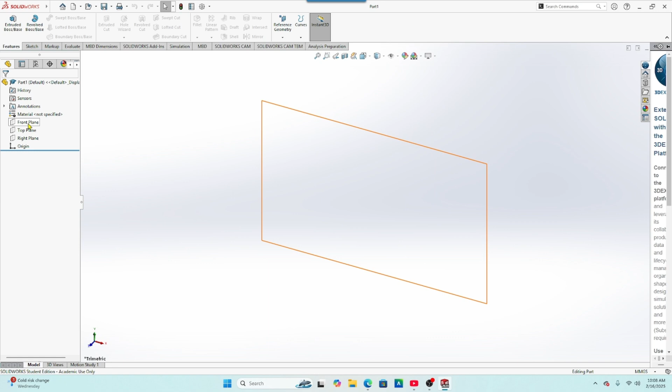I am going to sketch a line from the origin out to the right, approximately 210 millimeters. Again, it doesn't have to be exact, we just want to be close. Make sure that you have a horizontal relation when you do this.

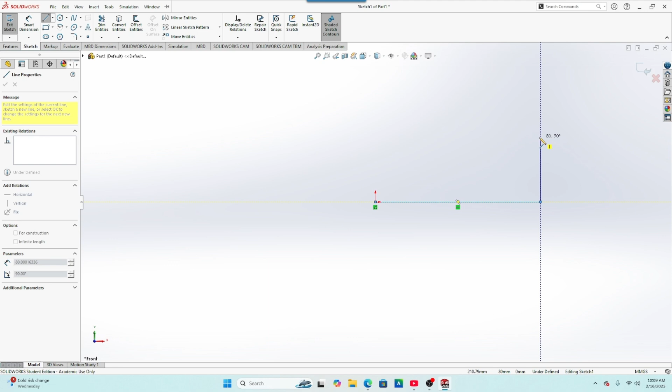Then we're going to draw vertically up to about 80 millimeters. Make sure that you have that vertical orientation. And then going to come out about 45, come back in. We are going to draw a radius that is approximately 25 millimeters, and then we're going to come down approximately 20.

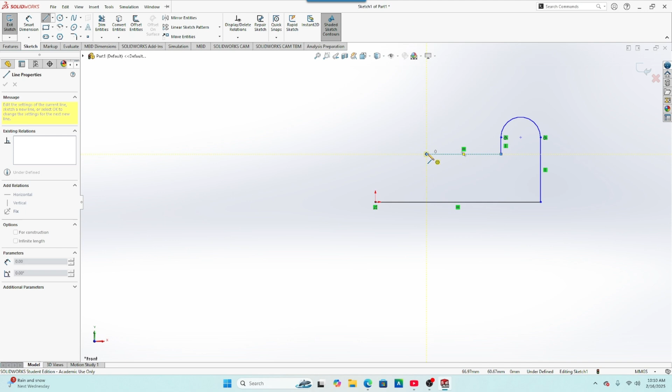Here I'm just going to kind of guesstimate a little bit. So come out to about, we'll say 95. And then I'm going to go straight up to about 40 millimeters, and I'll come out at an angle here, come back in to get our radius tool.

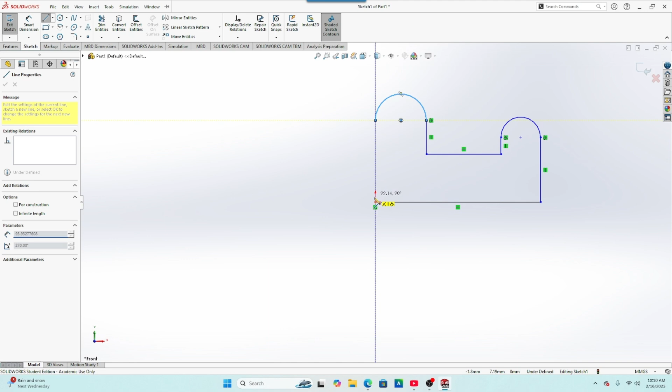Now at this point, I want to make sure that I get the vertical relation and I also get the relation here locked in, and then we're just going to come straight down. We've enclosed our sketch, and it turns a nice kind of bluish gray shaded-in color.

I'm just going to bring this in a little bit closer here. We'll exit out of our insert line tool, and we're going to start adding some circles. We need some happy little circles in here, right?

So we're going to do one that has a diameter of about 50 right here, and then we're going to do another one that has a diameter of 30 right here, so about 15 radius right there. And we'll exit out of there.

And then we're going to do a straight slot. I'm just going to come in right about here, and I want a slot that is... yep, probably didn't want to do that after all. Not right there, let's redo that one. It's just a happy little mistake, right?

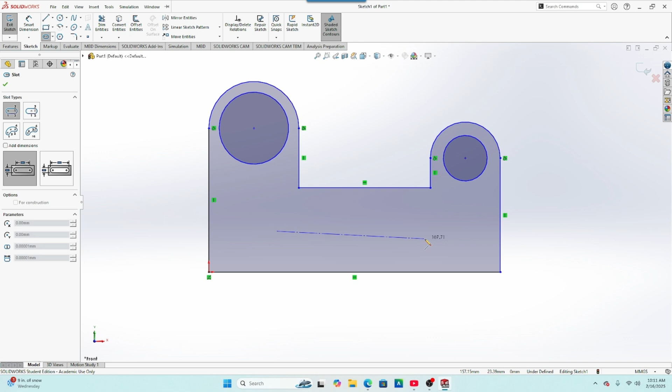So I'm just going to click right about here, I'm going to draw it about here. I'm going to make sure that I don't have any other relations locked in there when I do this, and then I'm just going to draw it like so. So we have pretty much all the features that we need now, and we are able to start dimensioning everything.

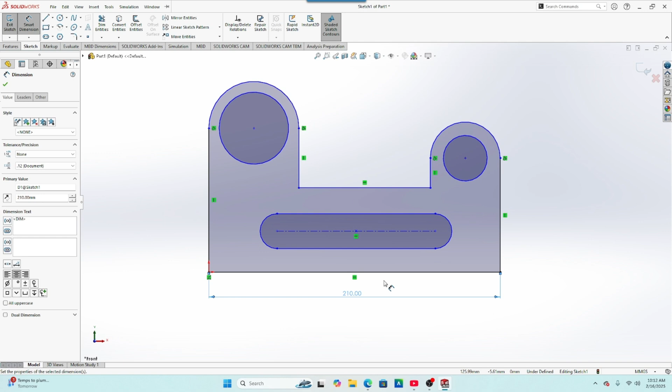So the first one that we're going to do is our 210 millimeter dimension, and then we have an 80, and we're going to do right there. And we have our radius of 25 - I'm not going to worry about that one.

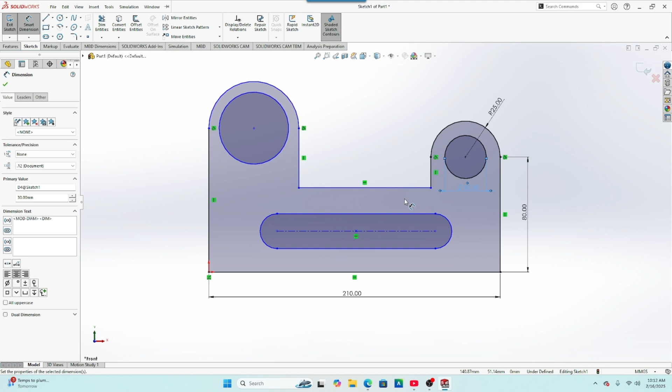Then we have a radius or a diameter of 30. I will not worry about dimensioning that one or this line right now, but I am going to dimension that one, and that's going to have a radius of 35. And then I'm going to dimension that to 100.

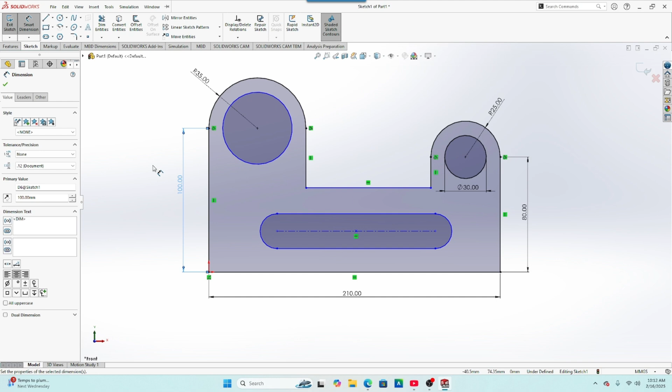And I need to dimension this line to the origin here, to 60 millimeters. And we almost have everything locked in that we need. We have a few things that we have to do.

We are going to dimension from the origin to the start point of our slot to 45 millimeters according to our blueprint. And then we're going to measure center point to 120 millimeters. And then we need to dimension our height here to 30 millimeters.

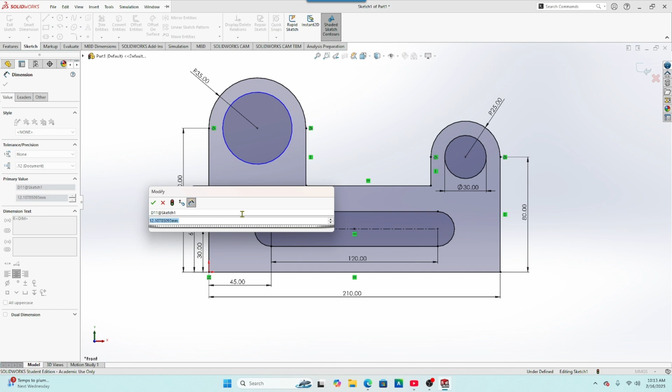And we need to dimension this to 12 millimeters. That locks that in.

And I need to dimension this to here. Yeah, we'll leave that one right there, and we'll get rid of this one right there. We'll get rid of both of them actually, and we'll redimension it to right there.

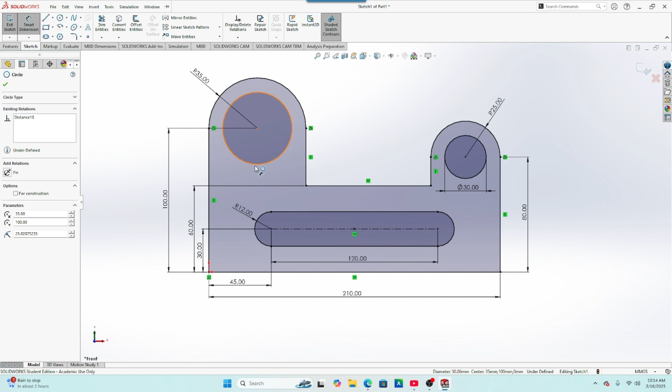All right, so we just about have everything here, but we do have our circle here that is not wanting to fully define for some reason. The reason would be because we have not dimensioned it yet. So we'll put that in right there, now at 50 millimeters, and we have a fully defined sketch as identified below.

The only thing that we have left to do now would be to put in 2 fillets that are a radius of 10 millimeters. So if we go up here to our fillet tool, and we're going to make sure that they say radius of 10 millimeters, and then we'll just click on these corners right here and add 2 fillets, hit our green check mark, and we are done.

We have a fully defined sketch. We can save this as Chapter 5, Hands-on Test Drive 1. So we'll say Chapter 5, and we'll say Hands-on Test Drive 1, and we'll hit Enter to save it.

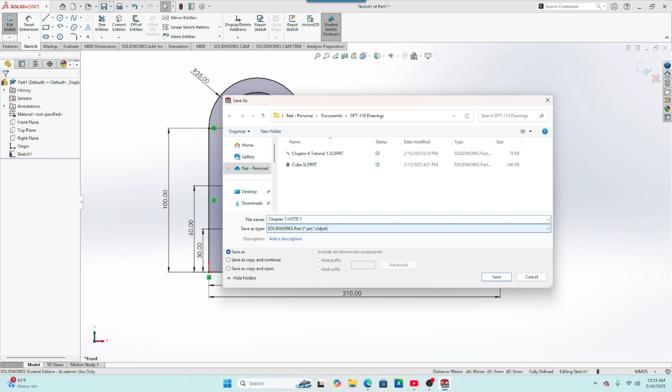It's now saved. If you look up here at the top, it shows that it's saved. We don't have a little asterisk up here showing that we have not saved any of our changes. At this point, once you've saved it, you can upload it to the assignments folder in Blackboard.